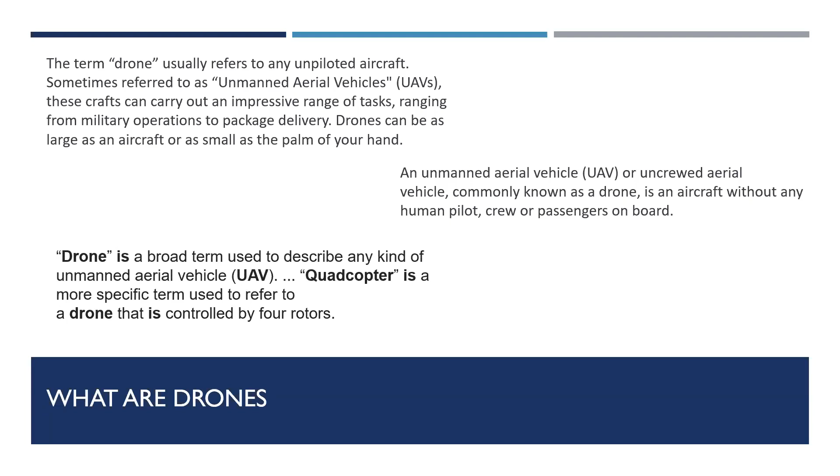A drone is basically a broad term used to describe any kind of unmanned aerial vehicle or UAV. Quadcopter is a more specific term used to refer to a drone that is controlled by 4 rotors. So there's a difference between a drone and a quadcopter.

When you hear the word drone, you must get a warning in your mind that we are talking about some military operations, something doing bombardment or spying. But our specific webinar is related to a type of drone which are called copters. Copters or quadcopter is the same thing, and quadcopter is basically a type of copter.

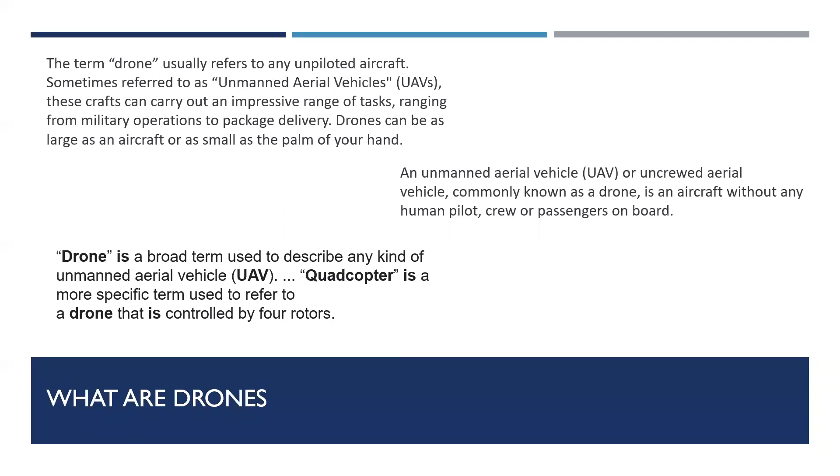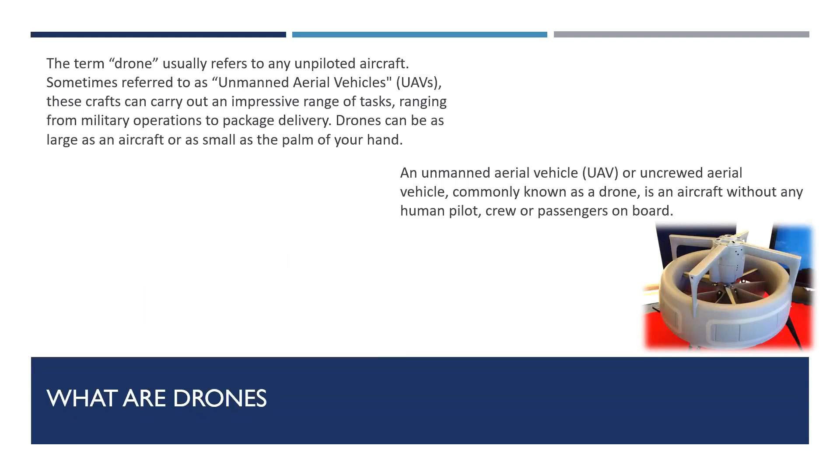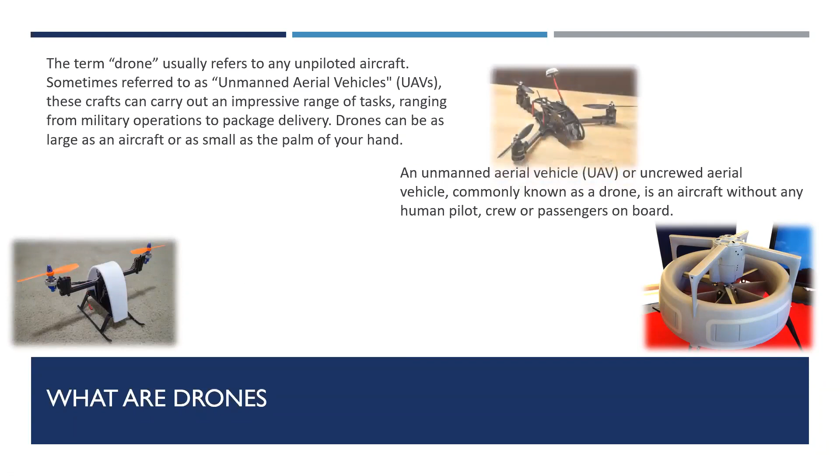So how many types of copters do we have in the world of UAVs? We have a unicopter that contains only one rotor, as you can see on the image. Then we have a bicopter that consists of 2 rotors. Then we have a tricopter. We have a quadcopter. So it's uni, bi, tri, and all these terms refer to the number of rotors a copter can have. So a quadcopter contains 4 rotors.

Then we have a pentacopter, hexacopter, octocopter, and so on. The octocopter is basically the finest and the most heaviest one, to my knowledge. These copters are used in different ways as per the requirement or hobby of the flyer, and all of them basically fly on the same principle. How these copters are built, how they fly, and where they are used, we are going to explore this in this quick and exciting webinar, inshallah.

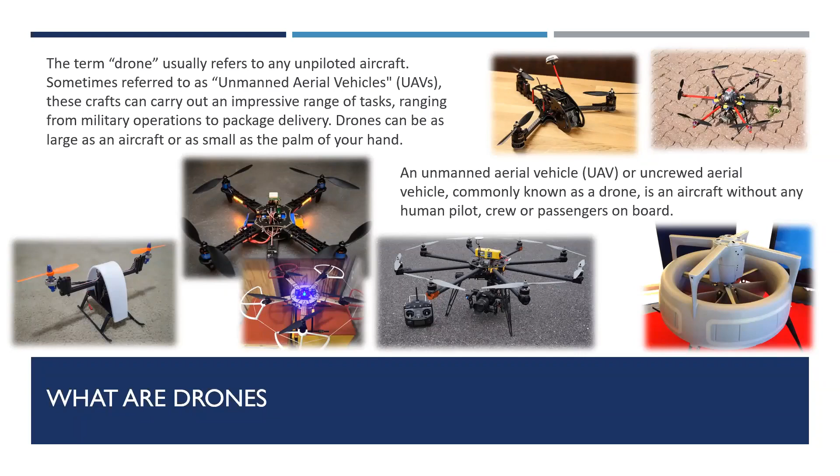Okay, so first of all, let's see where these drones are used. Drones are used in multiple industries in multiple ways. Drones can be used to deliver objects, your parcels, from one place to another. Amazon and some other companies are using these services. You place an order, the Amazon drone or quadcopter picks up your order from the warehouse and drops it at your specific safe location in your lawn, outside your apartment, outside your home, wherever.

They are also used for racing. They are also used for military operations. They are used in the telecom sector to monitor the towers where it's difficult to reach.

Drones or quadcopters are also used for cinematography, for making videos of different places you have visited. They can also be used in farms and agriculture, if you want to monitor your agriculture area, do some spraying of pesticides, or do some kind of monitoring.

The latest of these uses is the drone taxi. Drones are being used as your limousine or taxi, and very soon you're going to see this technology in the real world. Not long ago it seemed to be a dream, but very soon you'll be seeing flying taxis around you.

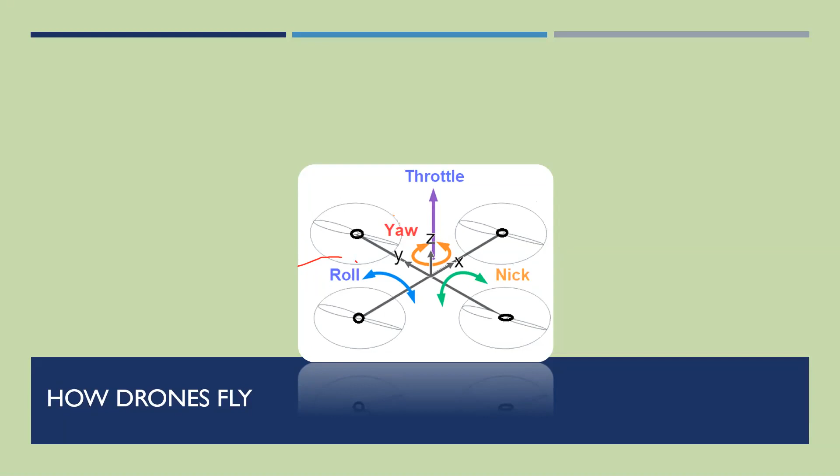Let's explore one by one what these forces are and how they behave. Yaw refers to the direction the front of the drone is facing. As you can see in the image, yaw is basically rotating your quadcopter in a clockwise or anti-clockwise direction in a horizontal plane. So this is called a yaw movement.

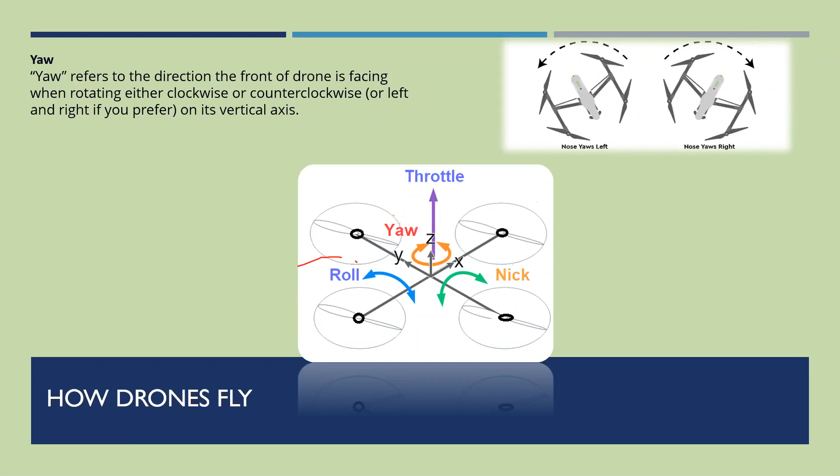And the roll is another type of movement that moves your quadcopter in a roll direction. So these are 3 basic movements of a quadcopter. These movements exist in all kinds of copters, be it hexacopter, pentacopter, or tricopter - any kind of copter has these 3 basic movements.

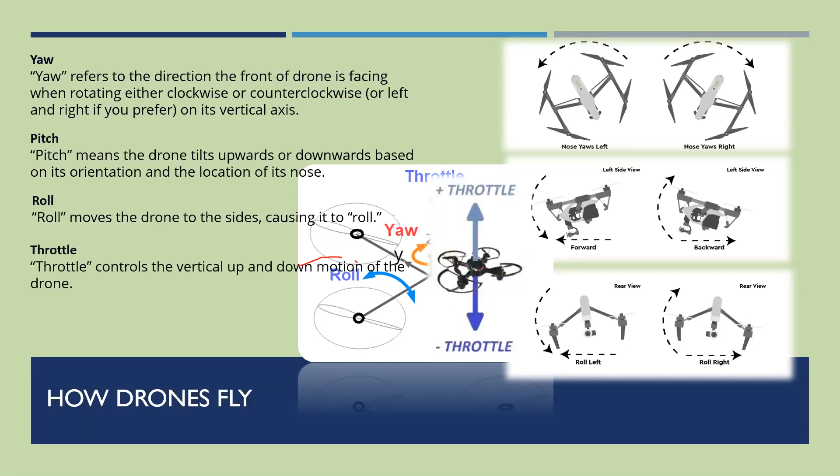The throttle is basically the power of the quadcopter that moves it upward or downward. If you increase the throttle, the copter rises into the air, like a takeoff. If you decrease the throttle, it lowers the height of the quadcopter, like a landing movement, or decreasing the altitude. So we have 3 movements: yaw, pitch, roll, and the throttle is a special movement that increases or decreases the altitude of your copter.

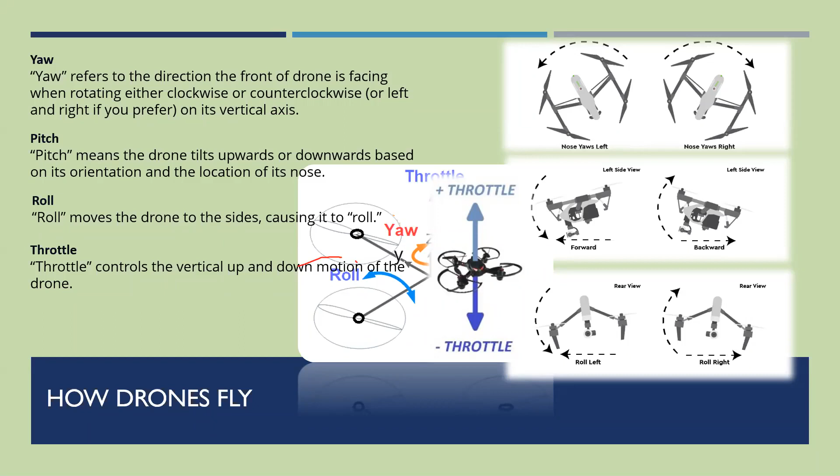As I told you in the previous slide, you must be thinking that in order to fly a copter, the rotors must be moving, and definitely moving in the same direction, because I want to move the copter upward. But you are wrong, unfortunately.

Nothing to be discouraged, because this is something new you are going to learn in this webinar: the dynamics controlling copters in the real world. In actual, the direction of the rotors on a copter are the same on one axis and opposite on the other axis. Why is that?

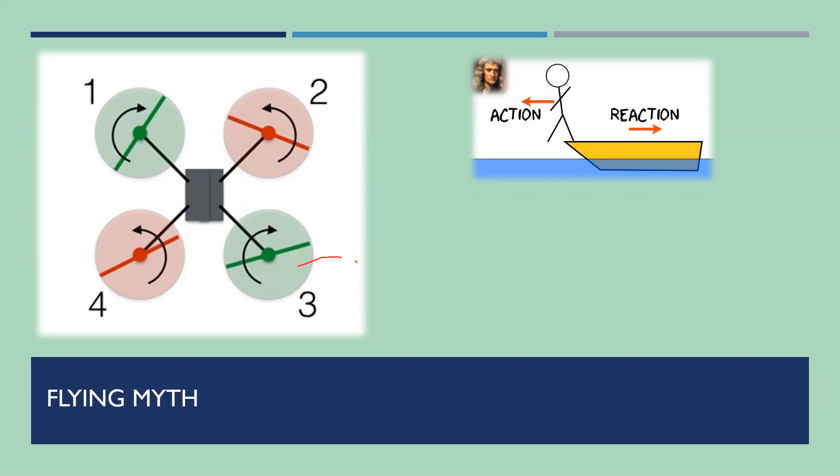You must have heard about Uncle Newton, Mr. Newton. He's a very famous guy, and we've all heard of his famous laws of motion - first, second, third - and he discovered gravity. He has a very famous law, the third law of motion: every action has an equal and opposite reaction.

You can see in this image of a boat, the person is trying to lean forward, which is an action, and as a reaction, his feet push the boat backwards with the same force. This is a natural law discovered by Newton.

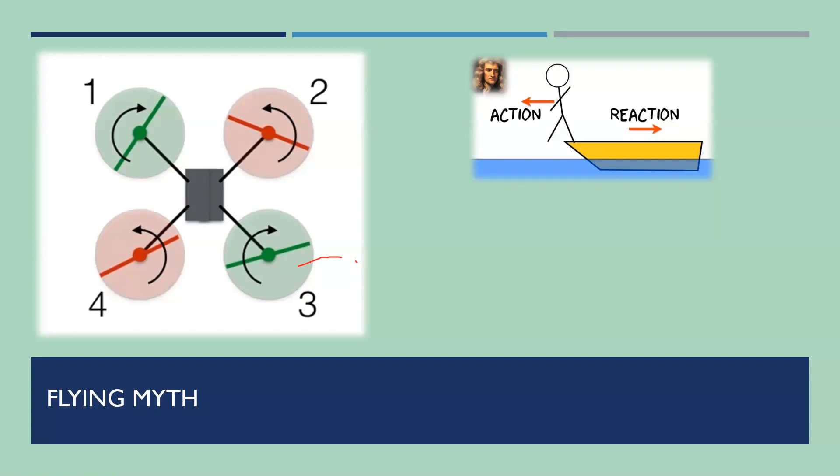Based on the same law, if all motors rotate in the same direction - 1, 2, 3, 4 all rotating clockwise or all anti-clockwise - the quadcopter will keep rotating in that direction. The cause and effect is important to understand with quadcopter blade rotation.

So to counteract this torque effect, which is cause and effect, we have to make sure the copter's rotors rotate in the same direction on one axis and opposite direction on the other axis. In this image, on the left side, rotors 1 and 3 are rotating clockwise, while 2 and 4 are rotating anti-clockwise.

This is how we counteract the torque effect, keeping the motors in this configuration so we have the motion as instructed by Mr. Newton. This is very, very important - I have seen myself and been through this incident.

If any of these motors is not rotating in the right direction, you can have a serious accident with your quadcopter, which could include damage to yourself and others. So make sure the direction of your rotors or motors is set up correctly.

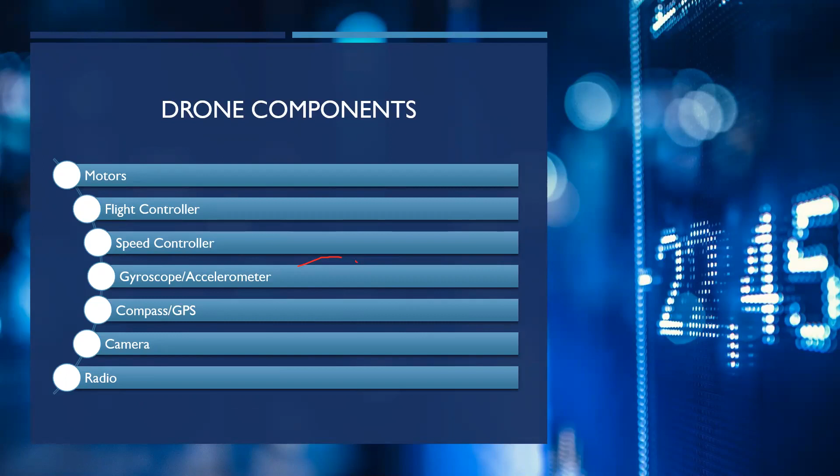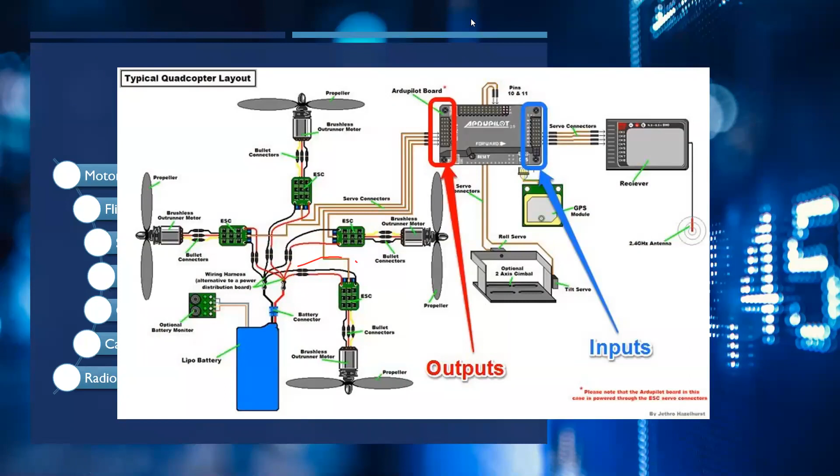So what do you need to build a drone or a copter? First of all, you need a motor with propellers. These are special motors called brushless motors. The motors in our toys are called brush motors, and they are not good for building copters. We use special high-speed, high-torque motors, which are the brushless motors, and we need propellers on them. Then we use ESCs, electronic speed controllers, which control the speed of the motors.

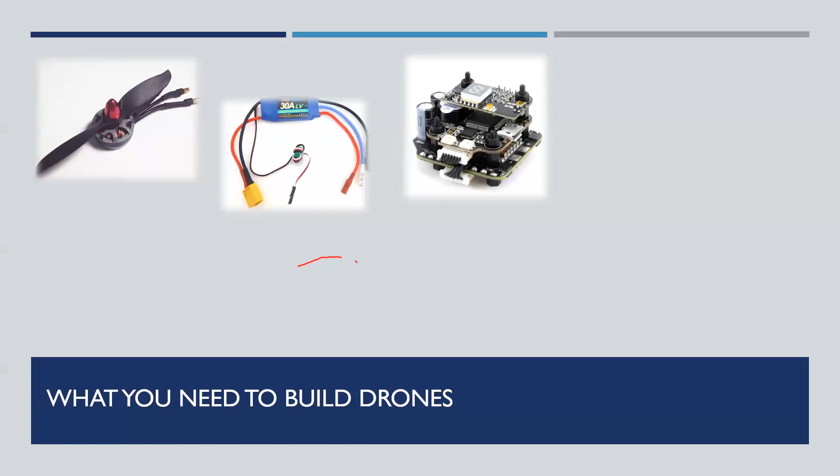Then we need flight controllers. We have different flight controllers available in the market from different companies. Then you need a radio transmitter that sends a signal to your flight controller, and a radio receiver connected to the flight controller that receives signals from your transmitter. Then you need an optional camera, again connected to your flight controller. Then you need a GPS, and these GPS may or may not have a built-in compass.

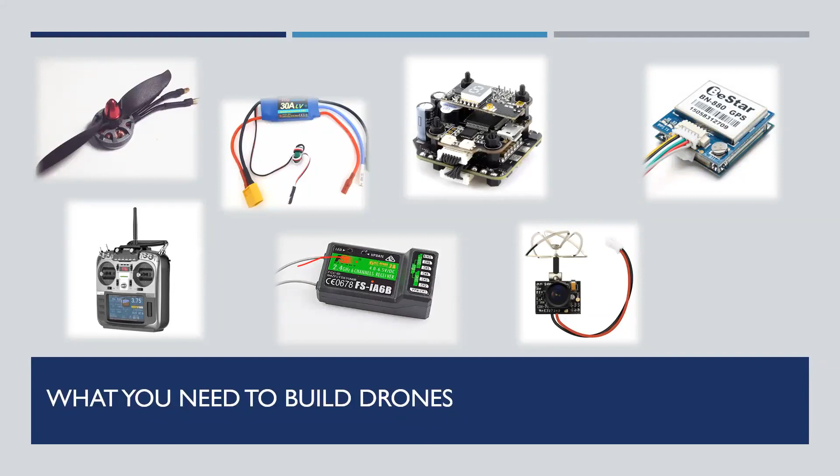So how can you build a copter, or start building one? First of all, you need to choose a frame. What kind of frame do you need to build? I'll show you a couple of frames.

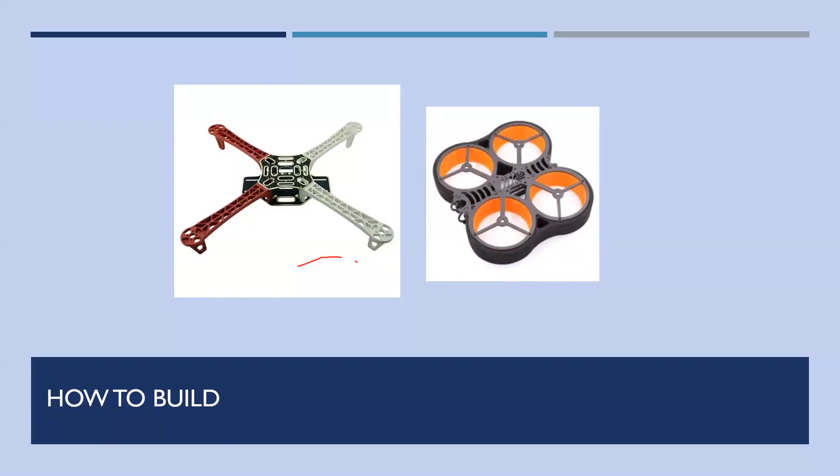You must be seeing a special frame on the screen. This frame is a Cinewhoop. A Cinewhoop is used to do cinematography. If you want to capture videos or pictures of nature or of your land, you can use these frames. Or if you are into racing drones, you can use these mini frames. And if you are into more powerful stuff, you can have these special heavy duty frames. It all depends on the type of drone you are building.

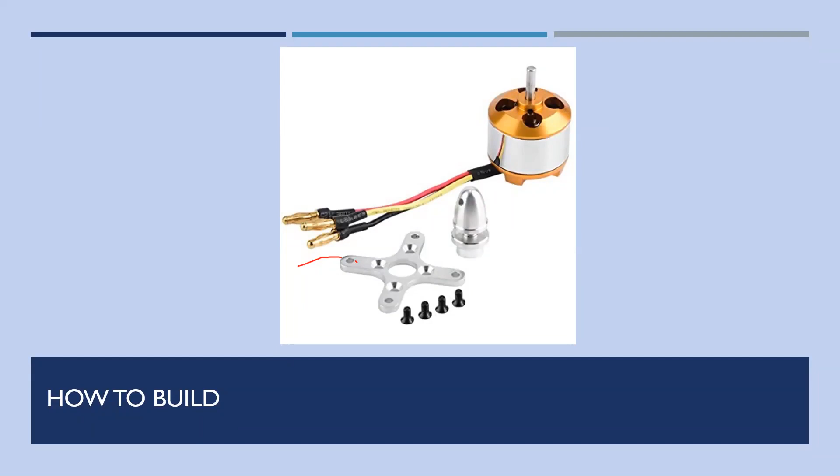Once you have selected a frame, you need to select different motors. We have brushless motors available in the market. These are the brushless motors. It has 3 terminals because this is a brushless motor, and these are specific motors that we use for the copters.

Then you are going to use propellers. We have different propellers available in the market. You can use a 3-blade propeller or a 2-blade propeller, depending on the type of drone you are building.

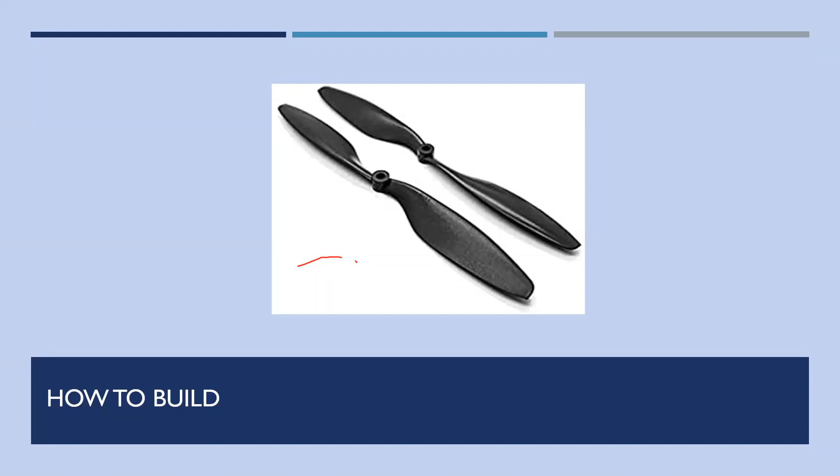Then you need electronic speed controllers. They look like these ones. Sometimes you may have a special board which contains all the ESCs in one board. So this is a special ESC which contains 4 ESCs on a single board, so you don't need individual ESCs, and you need a single board that can control your 4 motors.

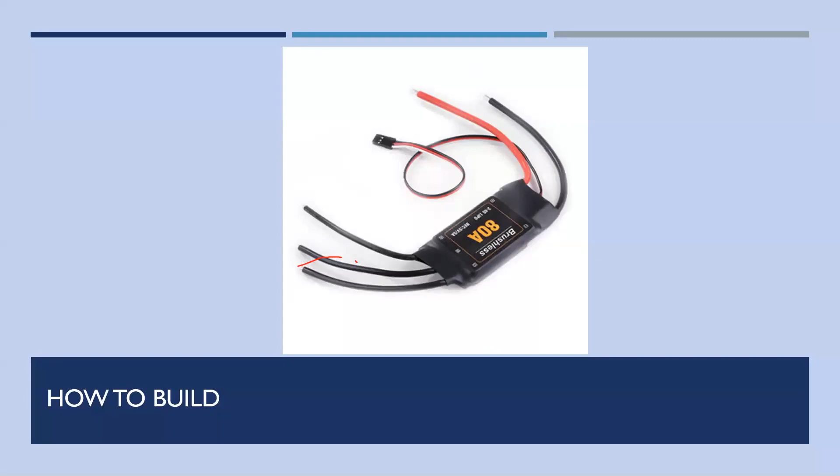After that, you need a flight controller. The flight controller can be like this, or it can be different, depending on from which supplier you are purchasing it. A flight controller usually has a built-in gyro and accelerometer, so you do not need to buy and connect externally.

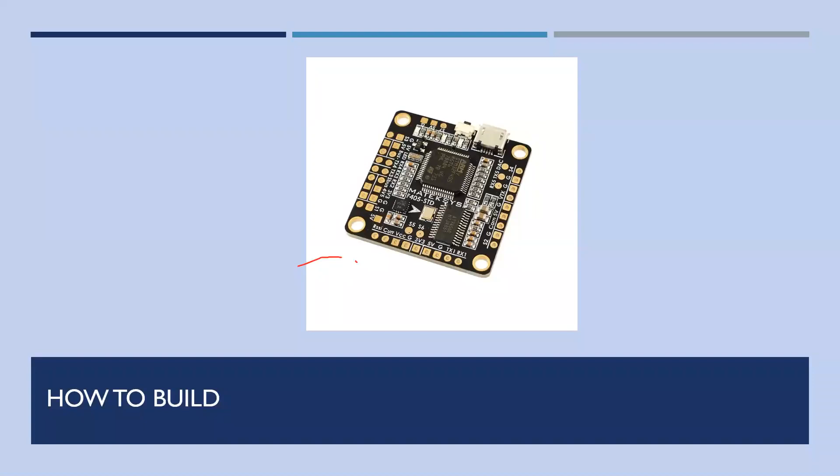Then you need a GPS. A GPS looks like this, or the one shown on the screen. It depends again on the supplier. These GPS have a built-in compass, and the compass and GPS tell the position and orientation of your copter.

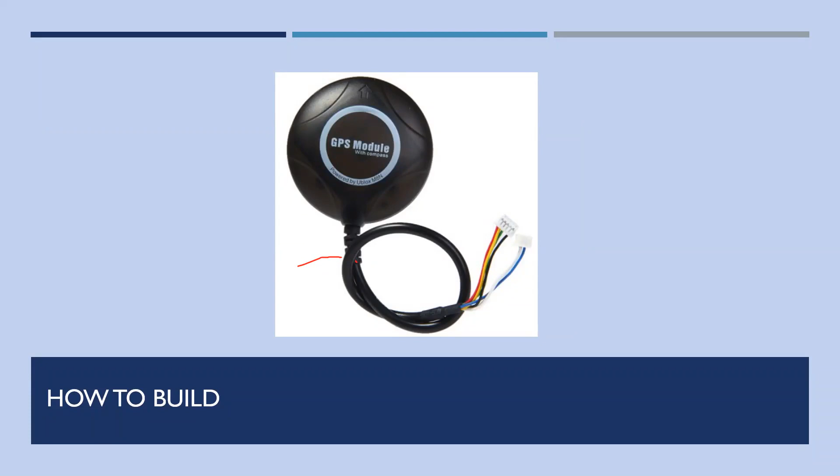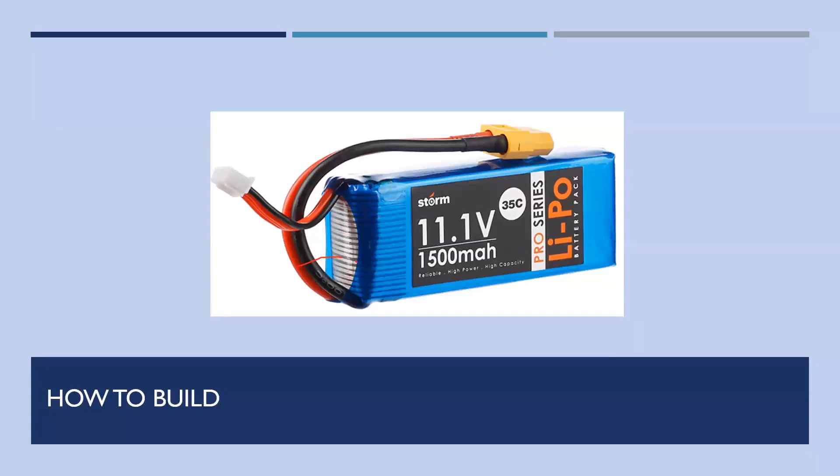Then you can use a camera. Okay, so once you have all this stuff, you need to power up using batteries. We use special batteries called LiPo, lithium polymer batteries. You can use nickel cadmium batteries as well, but the most popular ones are the LiPos. You can purchase them from different places.

After you have gathered all your hardware, you need a flight controller software. We have many flight controller softwares available in the market. The most famous ones are iNav or Betaflight. Others are CleanFlight, ArduPilot, and many more.

Once all these hardwares are ready, you can connect them with each other. Every flight controller has its own connectivity method or wiring method that you need to follow.

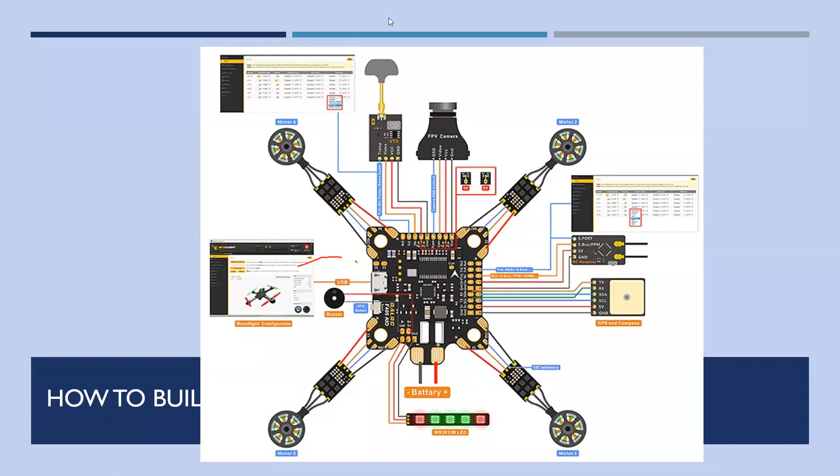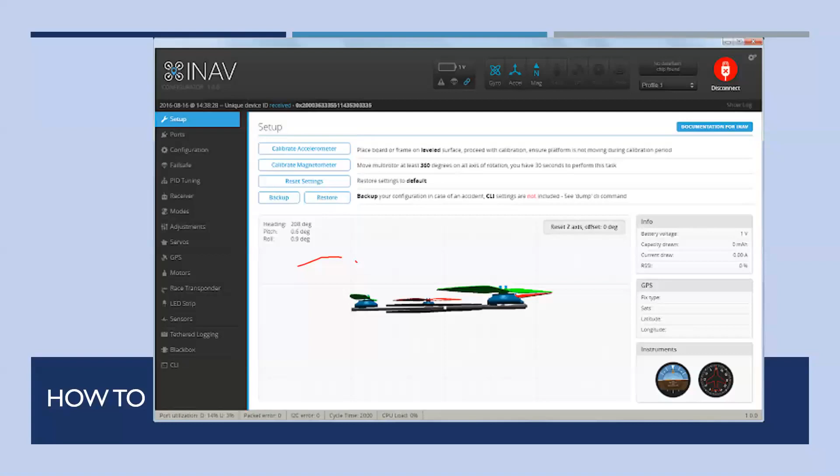Once you have set up the hardware, you need to do the configuration on the software part. There are different configurations available based on the software you are using, and there are different tutorials available that you can follow to do the configurations of these flight controllers. After these configurations, you can do different tunings required to make sure your copter is flying in a proper and controlled manner.